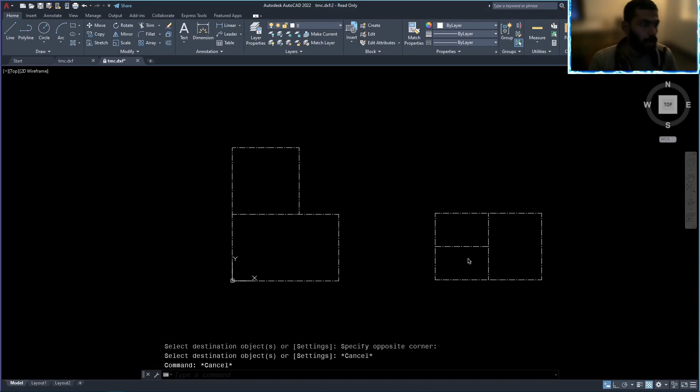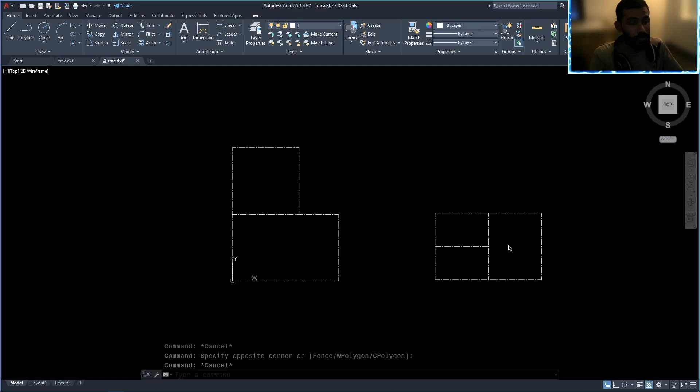Let's try to import two different plans into a single STAAD Pro model. You might have a big plan, so for the sake of this video, let's try to export it. This is the floor plan from ground to story number 5. From story number 6 to story number 10, this will be the plan. This plan should not be split into two different drawings, rather it should be placed into a single drawing so we can put all these plans together and extrude it, putting one on top of the other.

STAAD Pro doesn't allow you to import two different drawing files, so sorry about that.

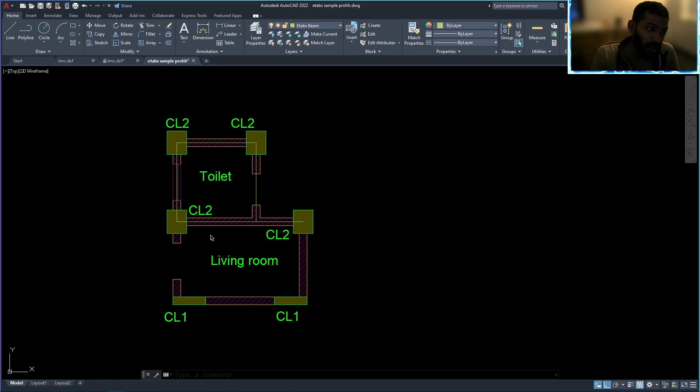First thing, let's draw the center line. This is obviously the center line, so you can say that this is a center line diagram. We don't need to export the column, it's only possible to export the center line where the actual load passes through, the center line of the beam, and that's what you see right here.

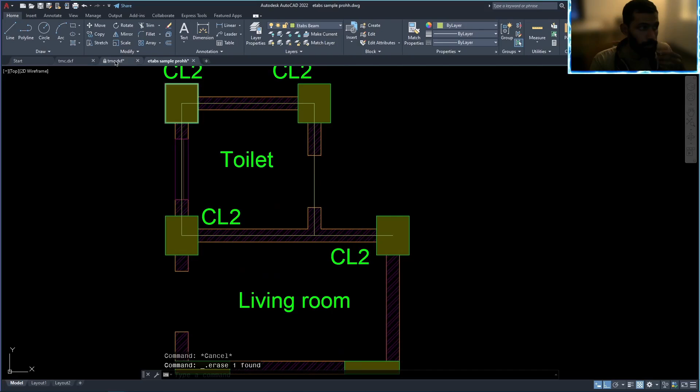Center line can be drawn in many different ways if you're having the latest version of CAD, maybe from 2018 onwards, I don't remember exactly. You're having a command called center line, and using it you can pick up 2 points, first point and second point. By picking 2 points you will have the center line, and by making use of this, I've drawn this figure.

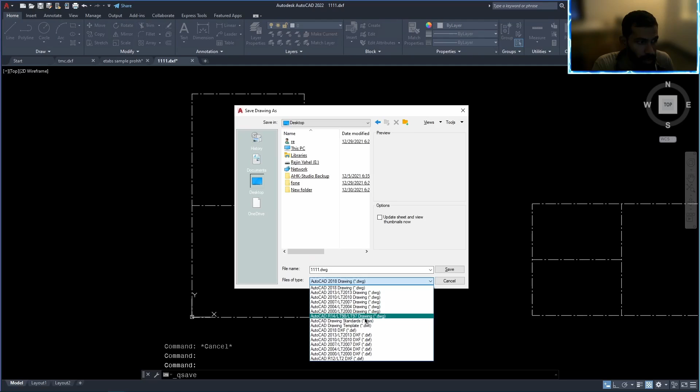Units are quite important, so let me check the size, you can see that the unit is in centimeters. So get into the units settings and pick up centimeters right here. Now you can save the file. Right in here, I like to pick up DXF, save it, and closing AutoCAD is quite important, so I like to close this drawing itself.

Now I like to use this as a reference to pick up the columns.

Into STAAD Pro, create a file right there. Get into file and import, pick up DXF, and right in here I like to pick up the DXF file, and you can pick up Y is up.

You can see that right here, the global Y is towards the upper axis, you can pick it up right there. Now pick up the unit. I'm not considering whatever the unit of force is. Pick up centimeter, which is the same unit that I used in AutoCAD.

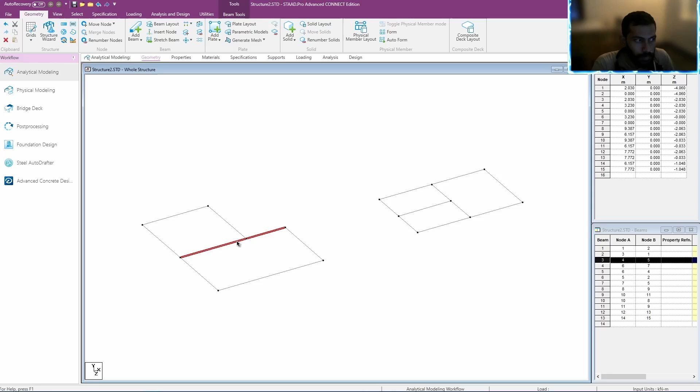The first step is to change the units. I'm quite comfortable working with meter, kilonewton units, so change the units. All right, the first thing is I like to get into here.

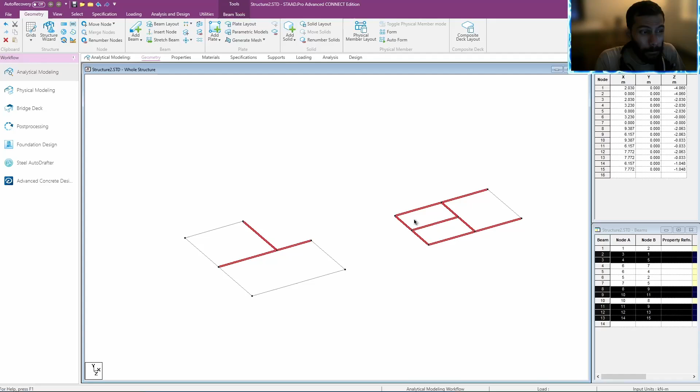I like to break up all these beams here, get into highlight and hit OK. That will select all these beams which are even connected, touched, but not yet broken. So highlight and intersect it.

That will break the beam right at this node. If you didn't perform this action, that would eventually not transfer load into that node.

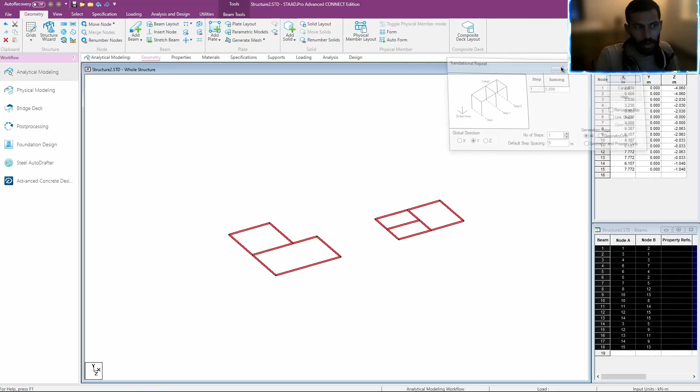The next thing is I like to copy it, select it, translate and repeat. I like to translate it along the y-axis, and now these two objects should pass 5 stories having a spacing of 3 meters, and I don't want you to link this.

It's quite important, do not link this, which is very important. So this is what you see.

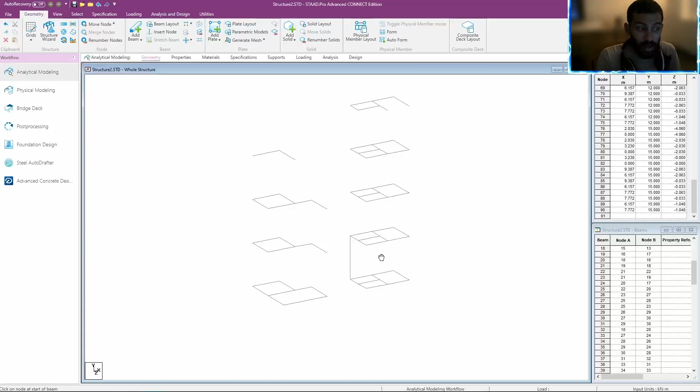Next step is to connect these objects, connect it, and remove the base part.

Next thing is I'd like to copy the whole asset, and now you can cut it. Next is paste it, cut it, paste it. Where?

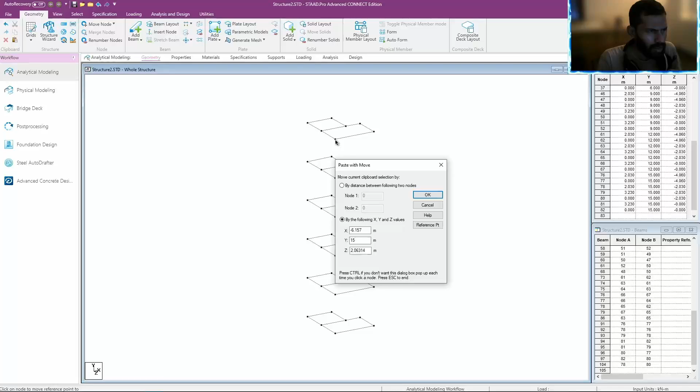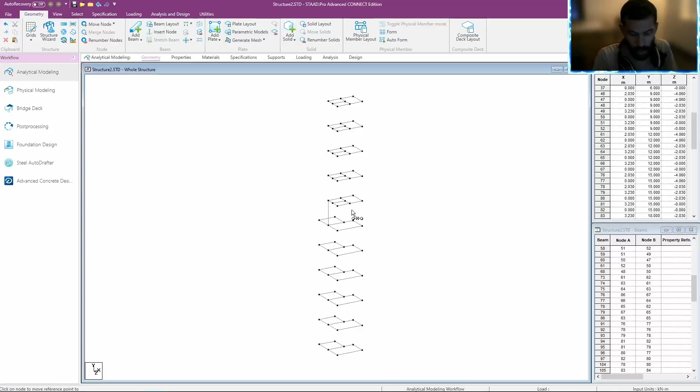Pick up the reference point. The point is right here, and this point should snap right onto this point. This point should snap right into here. Okay, that's cool, you can see that's a perfect snap.

Then what we're going to do here is modify the stories. Now let's try to modify these stories here. I'd like to get into a new view here.

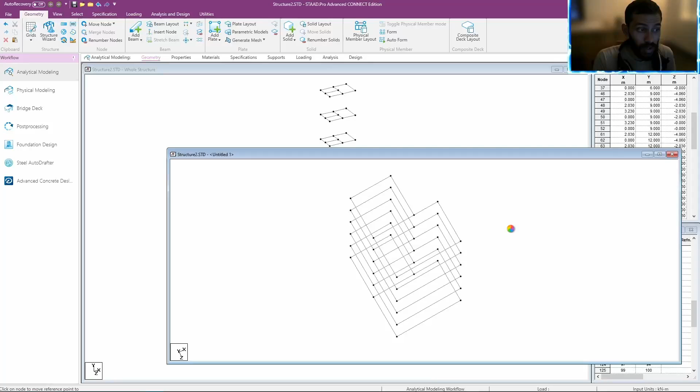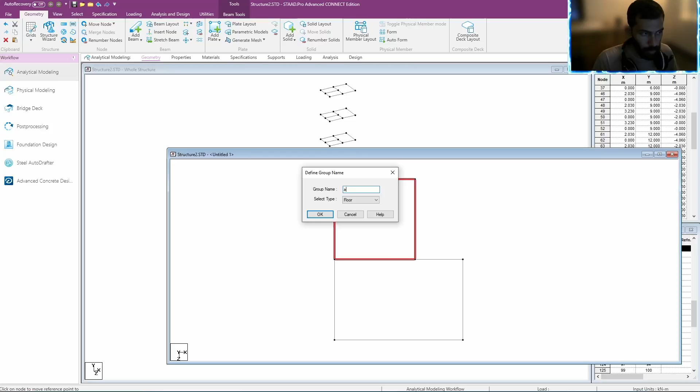Now this is what I want. I like to isolate these objects here. Right after isolating, I like to convert this into a group, so then I can assign some sort of floor loads here. You can select this room, and I think that's a toilet. There's a toilet. Control G to create group floor, and this is room number A, or maybe the toilet.

That's cool, and associated - hit associate. Next thing is get into here, create, and this is, I think, dining or living. It's the living room, and this one should be floor, associated.

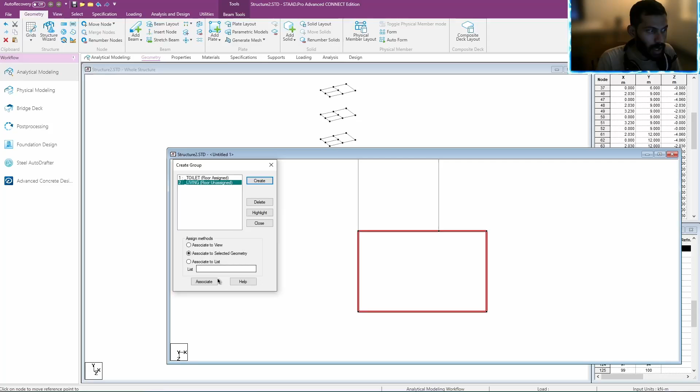All right, now close it. So the bottom story has been assigned. Now let's try to understand what's happening in the case of top stories.

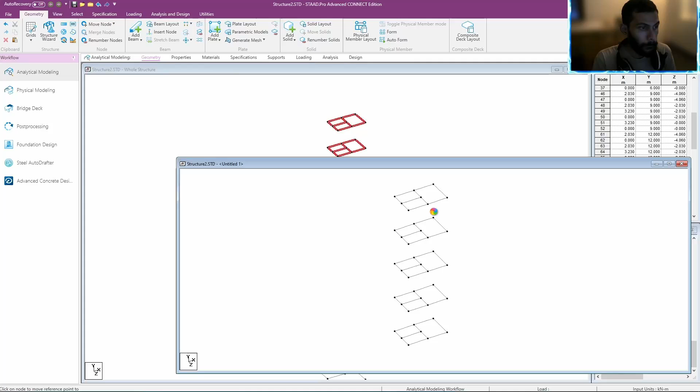You can select it, get in here, new view, and I'd like to display the new view in a new window. You can have a similar procedure. Control G, room number C - I don't have any name to put, so room number C, and here I'm going for maybe room number D. Associated.

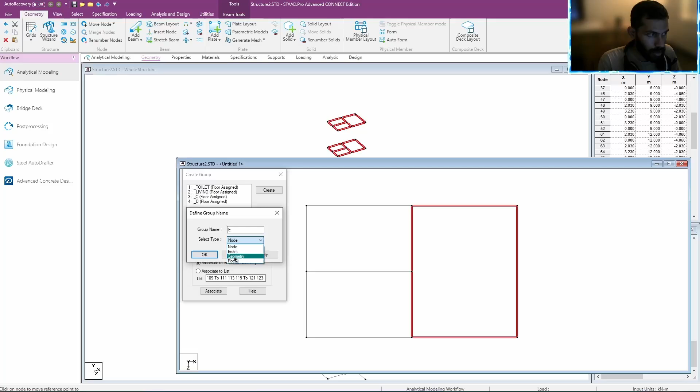The last room is E, make it floor, and associated. Right, everything has been assigned.

Let me try Control G again, and highlight it. This is room number 1. Next thing is, let's try to isolate it again, and now let's try to connect. Next step is connecting columns.

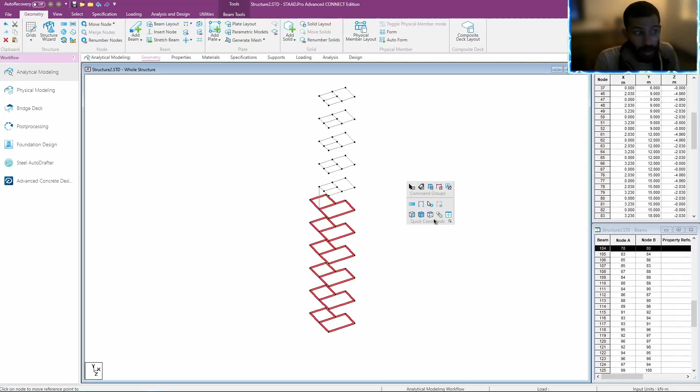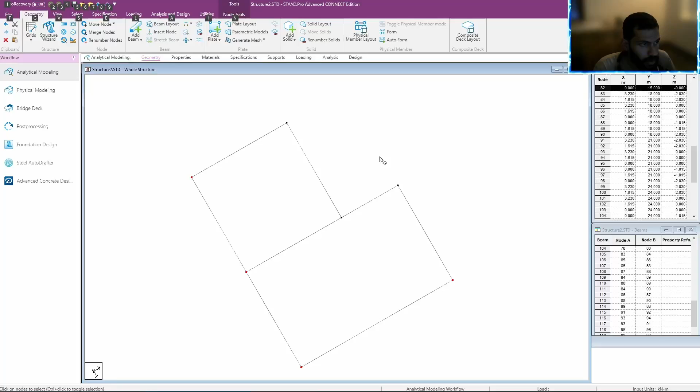Okay, let's select up all these objects, and now get into the top view. What we're going to do here is get into the node cursor, and I can select all these nodes where it's supposed to have columns. Selecting all these nodes, and we can connect the beams along the y-axis.

Okay, look into here. The beams are already here, and now what I can do is delete the base, which is supposed to have the footing.

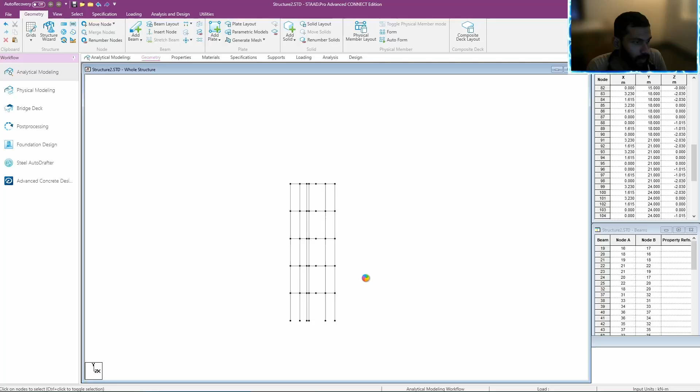Get again into the node cursor, and now assign some supports here. Go for fixed. Now let's see what's happening in the other case.

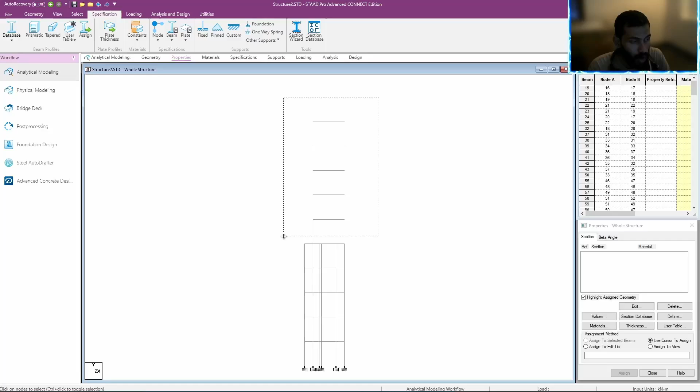Right in here, what we can do is get into the front view. I can select all these objects, all of these objects. Now get into the top view, assign materials, assign support, assign loading.

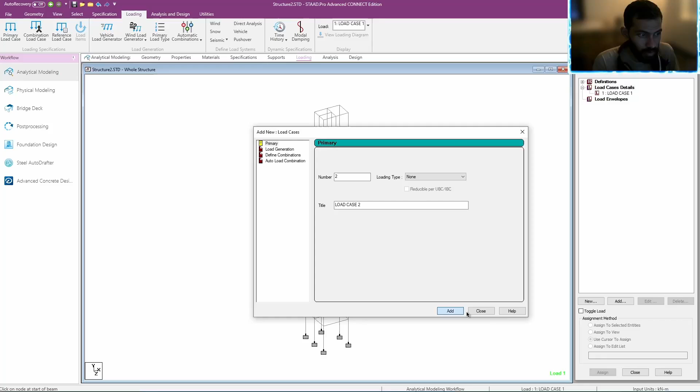In the case of loading, I'd like to specifically assign a floor load - not the dead or live load type, I'm looking for a floor load which is in a group. The group is maybe the toilet, carrying maybe -2. Next is the living room, carrying maybe -3. I don't care what the number of the load is.

I'm trying to teach you the process of importing an AutoCAD file right into STAAD Pro. Once the model is complete, it's your process.

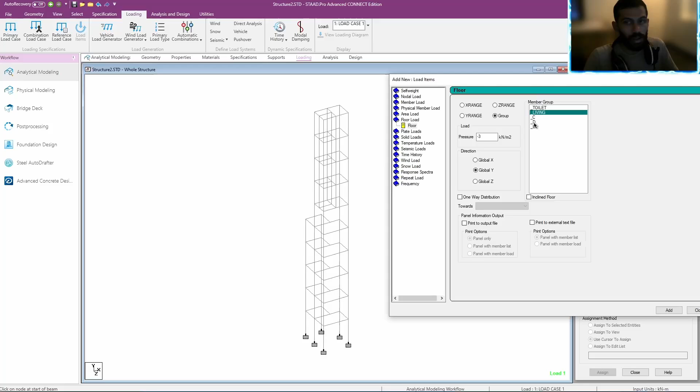Okay, I'm only considering these 3 points. You can see that everything is working properly. That's it, that's it now.

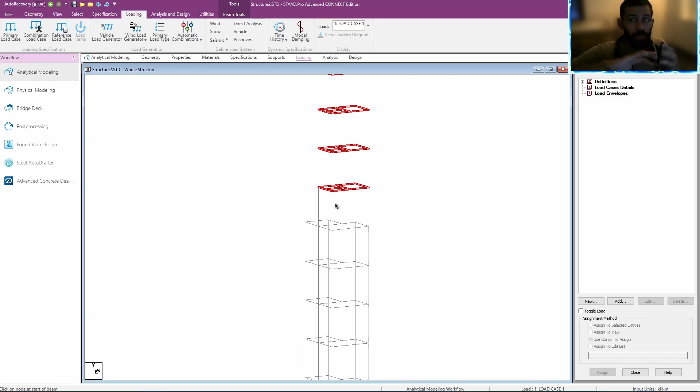The process totally depends on the type of junction that you have. Maybe if you're having a continuous column going from bottom to top, it's totally okay to do this process. Right, what we want to do here is select all the stories on top.

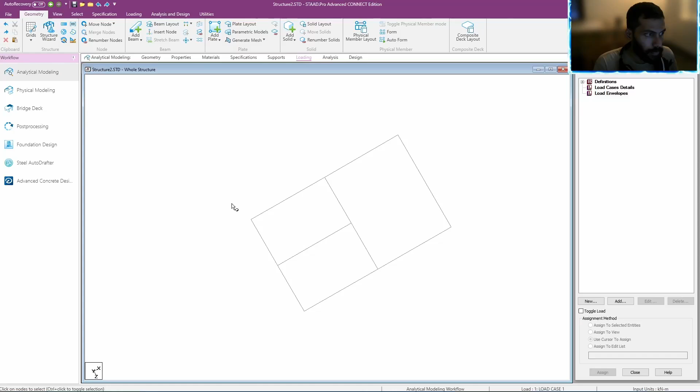I'd like to isolate it. Next thing is, where do we have columns? So pick up the node cursor, and again select these points 1, 2, 3, and 4. If the spacing is too low, you can provide columns onto these points too. Next, I'd like to connect it between the y-axis.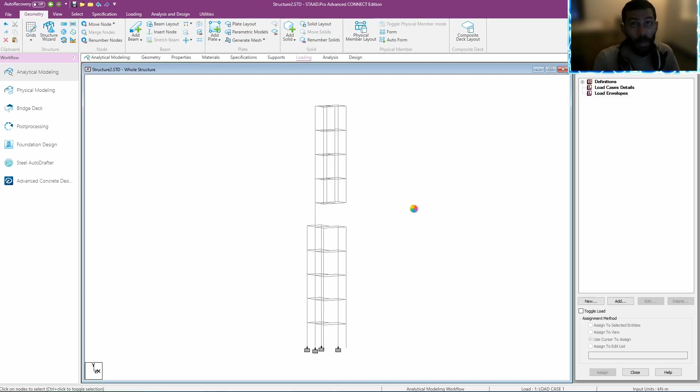That's okay, now take up all the structure. The next step is the merging between these two discontinuous floors. So we can select these floors and isolate it. So that's the right case.

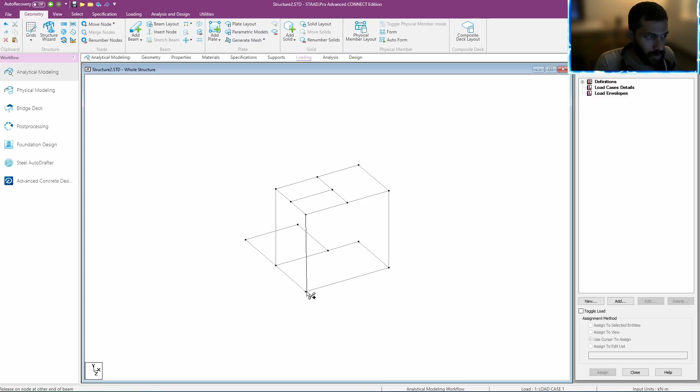You need to do everything manually, so you can add a beam right from here - first point, second point, first point, second point. I can't add anything right here, so I'd like to go for perpendicular intersection. First point is here, second one is here. Going here, first is here, second is here, first is here, and second is here. I think this is all right.

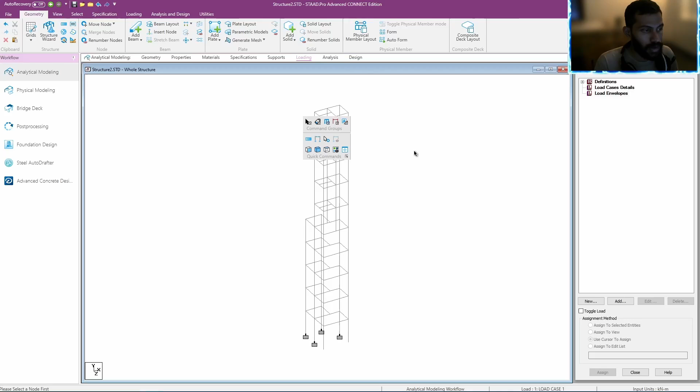Watch everything. Okay, all right, that's great.